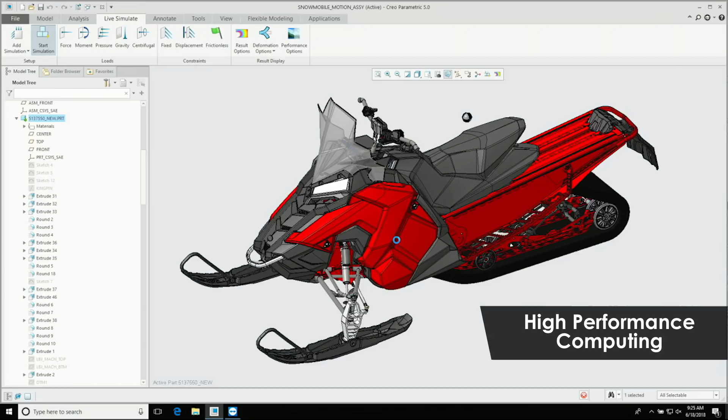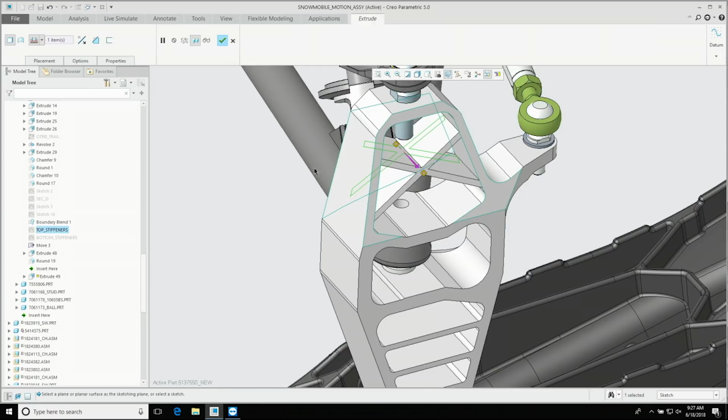This snowmobile has a certain part in its suspension that I'm fixated on. It's kind of rainbow colored right now to show the levels of stress and deformation. You can see that under load, this part's going to move around a lot. And if I look, there's some stress pockets here that are concerning - it's likely to break. So I've used analytics to simulate what will happen to that part, but now I can simulate it on each change. So I'm going to insert here some extra ribs, if you will, in this aluminum extruded part. And as soon as I commit that change, using high performance computing, we reanalyze that part, and I can see immediately that the problem's been solved.

So now think about it - with high-performance computing, I can simulate on each and every mouse click, basically, or certainly each and every change as I'm designing a product. I never get far off track because I have analytics in high-performance computing looking over my shoulder at the type of work I'm doing and guiding me each step of the way, whether each change I'm making is adding value or perhaps subtracting value.

Next, I want to talk about artificial intelligence and additive manufacturing through the lens of design. But before I do that, I want to show you something to think about, and that is how Mother Nature designs things versus how man designed things. So here's a quick little video clip thinking originally about a flying machine.

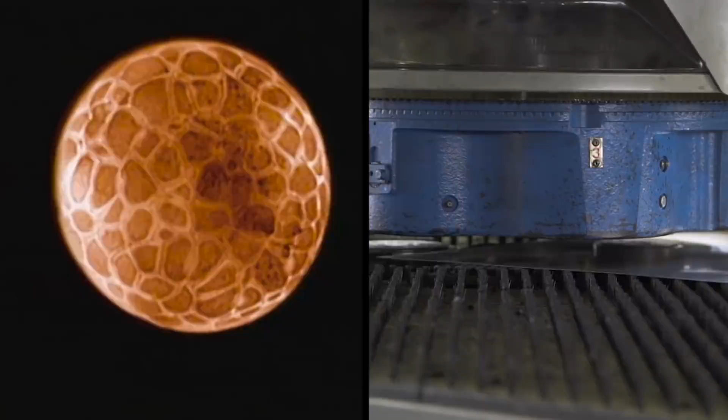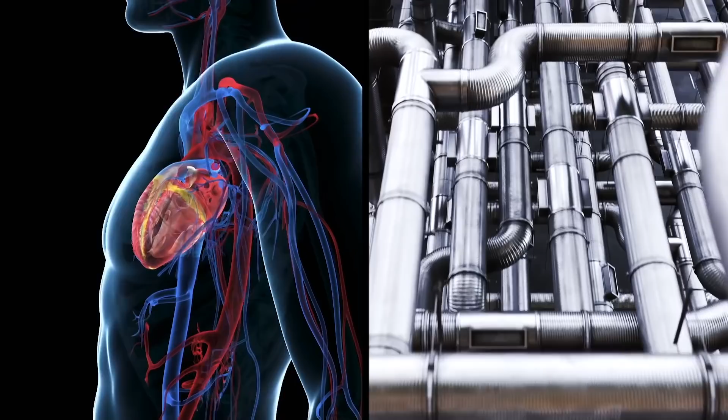Mother Nature makes very sophisticated designs using an additive process called cell division. And it yields very different solutions, for example, for capturing energy or for circulating fluids and gases and so forth. Mother Nature's systems on the left are extremely sophisticated and frankly extremely efficient.

Man's design on the right is trying to approximate that to the degree possible, but constrained by what we can actually produce. So, for example, the veins and arteries coming out of the heart have wildly variable diameters. That's pretty hard to produce. So in man's machines, much more of constant diameter piping and so forth.

So what's interesting is that if we use AI and additive manufacturing, we're no longer constrained to the limitations of traditional manufacturing processes, and we can get much closer to designs that really look like maybe Mother Nature created them herself. So I want to show you a quick example.

And for this example, I'm going to use an iconic Triumph motorcycle. Now, a Triumph motorcycle is a special product, and of course the cosmetic look and feel of this product is very, very important to the buyer. So I'm going to say, how could I radically change the design without making it look strange? Because probably if it looks strange, people wouldn't buy it.

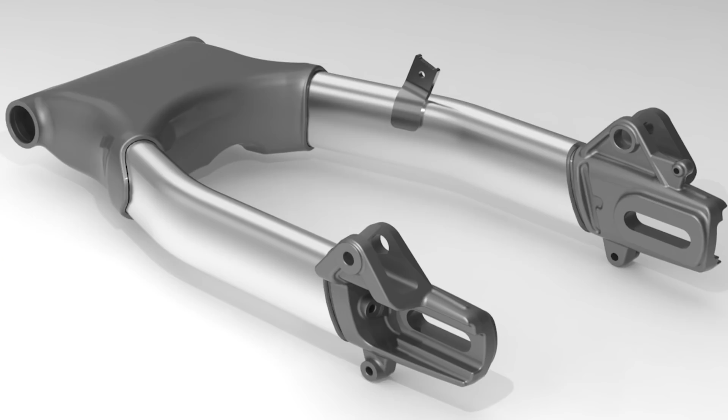And I'm going to use a strategy of AI-driven generative design on the front end and additive manufacturing on the back end. And I want to focus on a certain part, what's called a swing arm. It's the part that attaches the rear wheel to the motorcycle. It's a normal assembly made of steel castings and steel pipes.

It's 5 parts when modeled in a CAD system. That's what it looks like in traditional manufacturing. So now I want to switch to AI and additive, but I want to specify what the outer envelope looks like and then turn the computer algorithms loose.

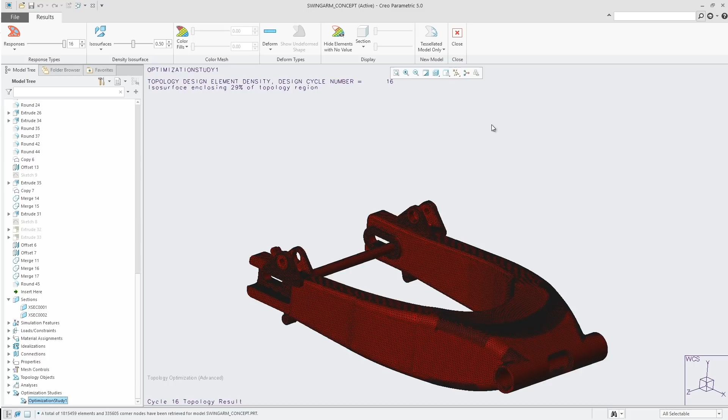So I say I want it to look like that outer shape, but you figure out what to put inside it. You don't have to make it hollow or make it solid. You can make it as hollow as you want, but make sure it works.

So the red elements here are really the areas that are calculated to carry meaningful load in the part. So you can see that's actually the efficient internal shape. Very, very strange shape, very strange looking.

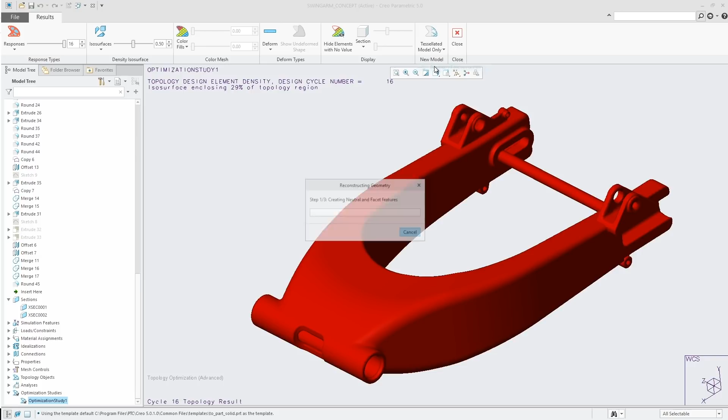And so by the time the CAD system regenerates this part with the human-specified outer shell and the algorithm-driven inner shell, I end up with a part that's really very interesting. It looks nice to the human eye, but look at the yellow shapes inside that human-specified outer shell. It's very, very elegant, interesting design.

Looks like something Mother Nature might have come up with. And it's a very efficient design. It will print as fast as possible, consume the smallest amount of material, weigh the least, and yet effectively carry the load. Realizing, of course, that the load is asymmetric.

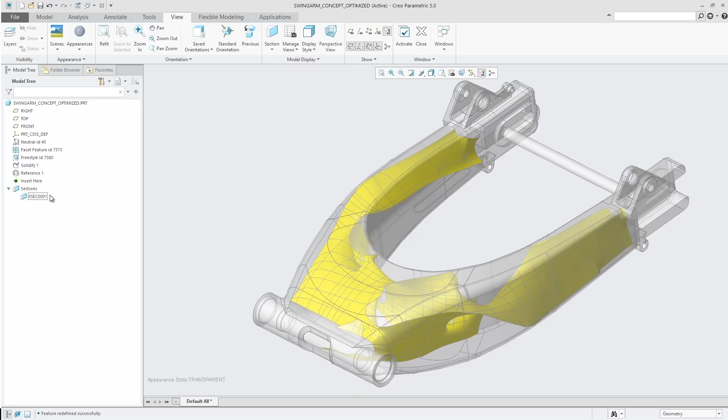There's a chain on one side, not on the other, and that's why the internal shape of the part is asymmetric as well. So a great example of collaborative design that's part human, part artificial intelligence, and in both cases, back-ended with additive manufacturing, because there's no other way that you could produce such a part other than to print it using, in this case, a metal form.

Now, switching from the physical part of products that are affected by digital transformation to the digital part of products, this is a profound story where more and more of the value of a product has become digital over time. This is an example inspired by John Deere of a tractor that maybe 30 years ago was purely mechanical. And then in the next phase, software came into the engine, software came into the cockpit.

Then they realized we could connect such tractors to the internet and track them, monitor them, optimize them. At the next level, we could actually have tractors share information with other pieces of equipment, and we could have a whole system of equipment that work together.

So for example, the harvesting equipment, the combine, if you will, could keep track of how much production we're getting from different areas of a large field, and that data could inform the fertilizing and planting strategy the next spring.

For example, we might put more fertilizer where production was low and less where production was high, and place the fertilizer in a narrow band, knowing that in the next pass we can land the seeds right within that band. So we'll fertilize the seeds and won't bother fertilizing the weeds between the rows.

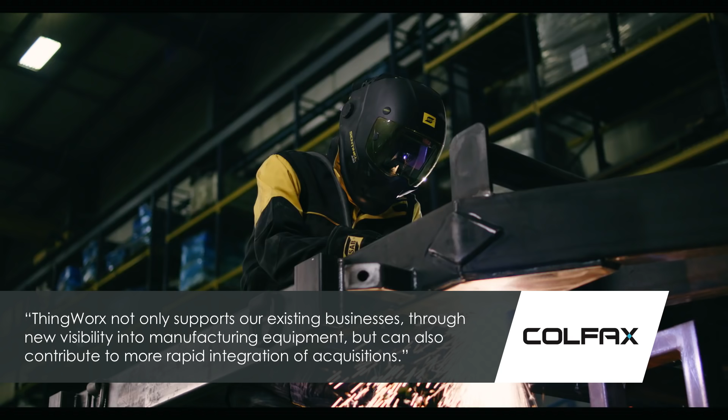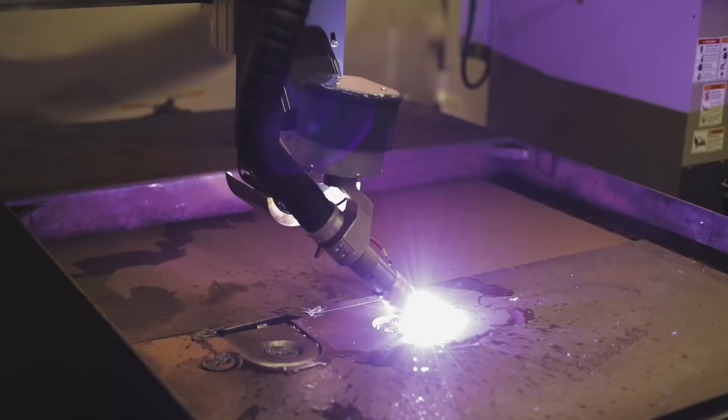Colfax is a company I know well. They produce, amongst other things, welding equipment, the ESAB welders. They might get used in a factory, out in the field to do repairs, in some type of cutting or fabrication process, in a custom shop, or in a construction process.

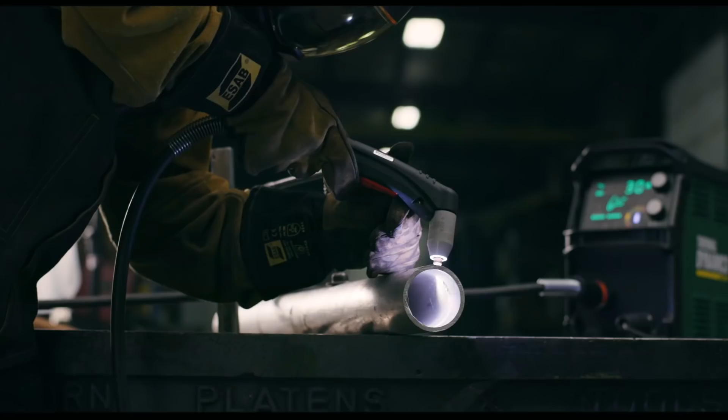So lots of different applications, and if I could gather data from all the welders and all the different use cases, grab the amps and voltage, when and how it's used, and frankly when it didn't work if there was a problem, I could very much optimize the design of that product, perhaps the production process. For sure, the customer support and service processes could be significantly optimized across a big fleet of very different welders, in this case from the company with the ESAB brand.

Let me switch to a different example. Otis has a strategy called Otis One that connects hundreds of thousands of elevators and escalators back to a central system, where they can be monitored. Predictive analytics can be used to determine when service would need to happen and to send service technicians out, fully ready to solve the problem when they get there.

Another great example is Trane. Trane produces heating, ventilating, and air conditioning equipment.

So these kind of units that you might see on the roof of a building, it turns out these units end up everywhere. I'm sure you can find them in every city, in every state, and probably around the world. But there are wear parts in products like this, and sometimes there are problems that need to be serviced. So Trane found there was a tremendous opportunity to make spare parts management much more efficient.

If I don't have any data about where the units are or how well they're working, then I need to have a lot of inventory of spare parts, because if any unit in any city goes down, I need to fix it quickly. Keep in mind these things only run when you need them to run. And if you need them to run and they don't run, somebody's getting uncomfortable.

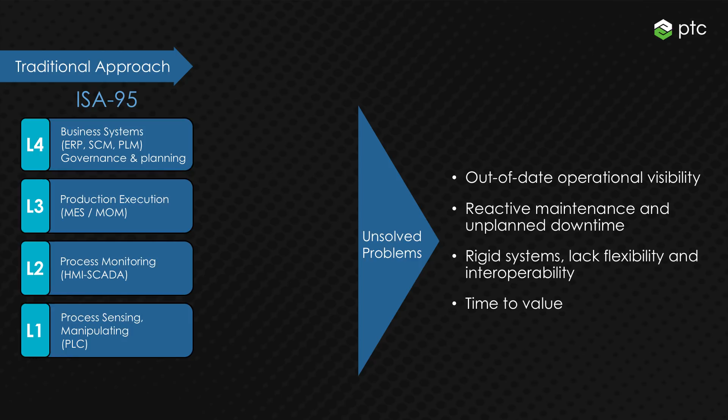So there's lots of data out there, but there are two main problems. Number one, these are silo systems - they all have part of the data, and they don't do an effective job sharing it with each other. The second problem is they don't actually have all of the data. There's a lot of data in other places that we really would need to get the full understanding of what's happening in a factory so we could optimize it. So even though progress has been made, the system could be optimized to a much greater degree.

That's really where the notion of industrial IoT comes in and is applied in the smart factory setting. The first thing an industrial IoT system does is tap into all the existing sources of data at level 1, 2, 3, and 4. But the second thing it does is tap into non-traditional sources of information. Lots of new sensors can be placed throughout a factory to measure heat, vibration, humidity, noise, whatever you want. And that picture can be integrated.

We could get data from external systems measuring weather or many different sources of potentially interesting information. We could get information from trucks moving throughout the supply chain - what do you contain, where are you, and how soon will you be here? And we could get information from other supply chain systems and so forth.

By integrating this all together - connecting, aggregating, and using analytics to help us understand this data - we can really change what's happening in a factory. We can do much better asset performance management, making sure machines don't go down unexpectedly. We can do much better operations performance management, making sure all lines run like our best line. And we can do many other types of optimization delivered through new applications that are role-based, real-time, predictive, and very flexible. So many companies around the world now are bringing in industrial IoT technologies, wrapping and extending their existing systems with a new layer of digital technologies.

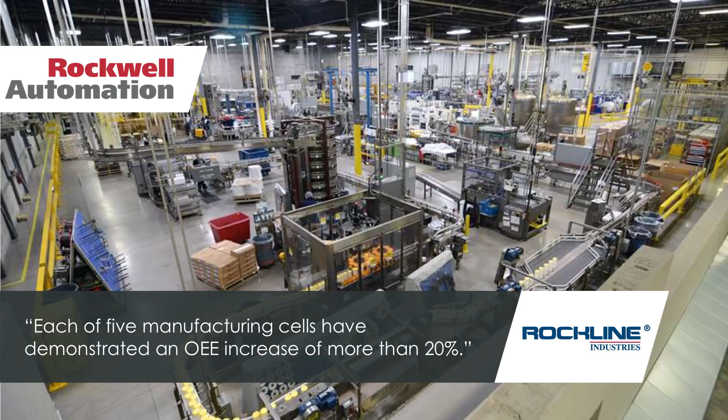Here's some examples. The company Rockline, a good customer of our partner Rockwell Automation, was able to instrument and connect 5 different lines and drive OEE up by more than 20%, simply by getting a better understanding of what's happening such that it could be further optimized. So a 20% increase in OEE is a very big payback in this type of industrial environment.

Or the company Woodward. Woodward produces many different parts used in aircraft, aircraft systems, engine control and monitoring systems, a lot of different components, but also equipment used in wind turbines, in automated production lines, and so forth. In this case, it's not about tracking the products, it's about tracking the factories that make the products. Woodward's done a good case of using industrial IoT and analytics data to compare all the different factories to each other, sort of internal benchmarking to understand where there are further improvement opportunities.

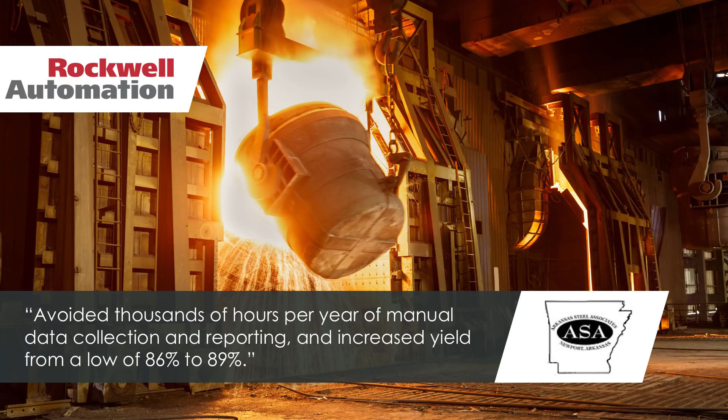Another great example comes again from Rockwell in the form of Arkansas Steel. Arkansas Steel, of course, has continuous improvement processes, as you might expect. But what they found is that it was so hard to get all the data when it required humans to go out and measure and collect and aggregate and analyze this data. By instead placing sensing and PLC systems and then gathering the data automatically, they were able to drive yield up by 3%. A 3% increase in yield really does move the needle quite a bit. So it's another great story about industrial IoT.

So thinking about operations, I mentioned industrial IoT. I mentioned artificial intelligence and analytics being applied to process automation. These are strategies that really do move the needle for manufacturing companies. So the last thing I want to talk about is people.

Now, manufacturing enterprises have a lot of people. And maybe a strategy in former years was to bring in more automation so that we didn't need as many workers. But I think in every case, there remains a lot of workers because there are many problems that are much easier to solve with people than with automation. Now, what if we could make people much more productive?

So I want to start by saying there's a very large problem here that needs to be solved. There was a study done by the National Manufacturing Institute, part of the National Association of Manufacturers, in conjunction with Deloitte, and it's been updated a few times. Their latest conclusion was that by 2025, there will be about 3.5 million production workers who have retired and only about 1.5 million who have been recruited to backfill them.

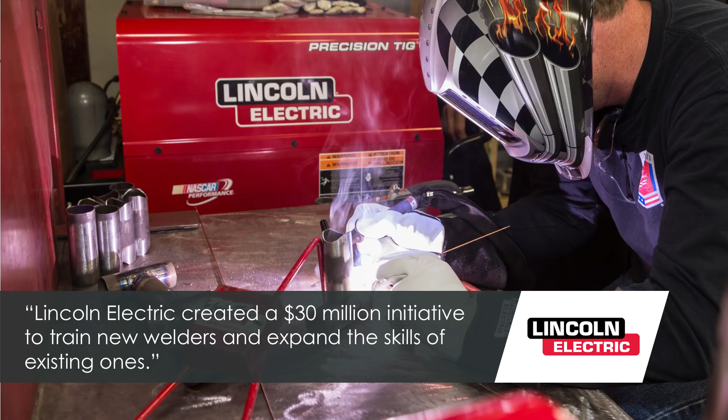Or in a much smaller environment, Lincoln Electric is spending $30 million to train new welders and to make the existing ones more skilled. So again, if Boeing's spending $100 million and Lincoln Electric's spending $30 million, this is a problem worth solving. So how could we solve it?

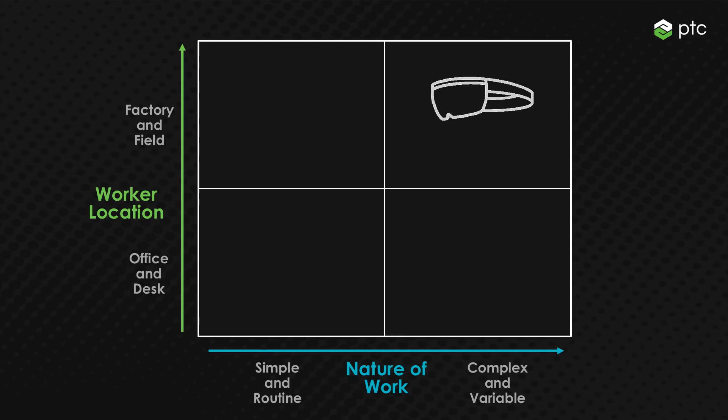What do we do? Well, I think the answer here is augmented reality, and I want to try to explain why. So first, it's worth looking at what is augmented reality. Augmented reality really means a set of technologies that allow you to take digital information and make it a natural part of the physical environment.

Now let me drill into that a little bit deeper. Let's imagine there's a digital cloud, as there is, and it's full of impressive computing and analytics power and a tremendous amount of digital data, which could be helpful to our processes, whether they're manual or automated.

Now, if our processes are automated, we know how to plug machines directly into that cloud. If you think about how much automation has changed in the last 30 years, going from paper punch tapes to the kind of automation we have now, it's an incredible amount of change that has happened in the last few decades. But let's think about how do we give digital information to humans?

Actually, I'd argue that hasn't changed very much. I have an iPhone here, and when I think of it and how I interact with it, it isn't that much different from the first Macintosh I got from the same company 30 years ago. That was an app that gave me windows of graphical and text-based information, and now I have a phone that runs apps that gives me windows of graphical and text-based information. So we really haven't advanced the capability of humans much at all, meaning robots have benefited from the explosive power of digital to a much greater degree than humans have.

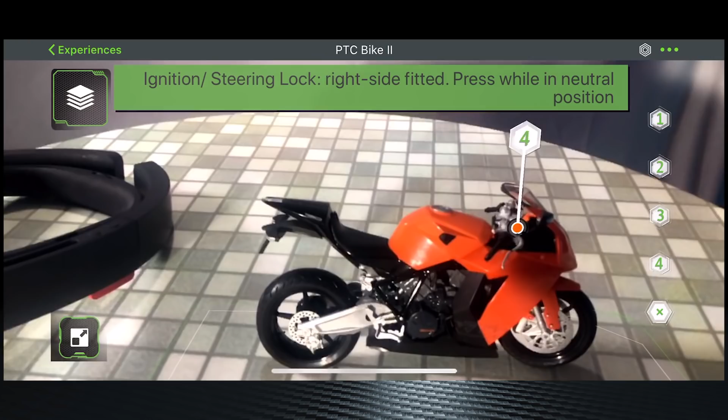Now finally I might say, anything else I need to know, perhaps from a safety perspective? And it says, yeah, just be careful because these parts, the engine and exhaust system, get hot during operation. So please be aware of that.

Now let's take one other example. Let's say I'm the service technician. First thing I could say is help me to assess this product, kind of like do a diagnostic x-ray, if you will, on it. And you see there's some parts kind of highlighted here in yellow on that swing arm.

And I might say, okay, analyze what seems to be wrong with those parts. And I see that there is a swing arm deviation, and here's the analytical data around that particular problem.

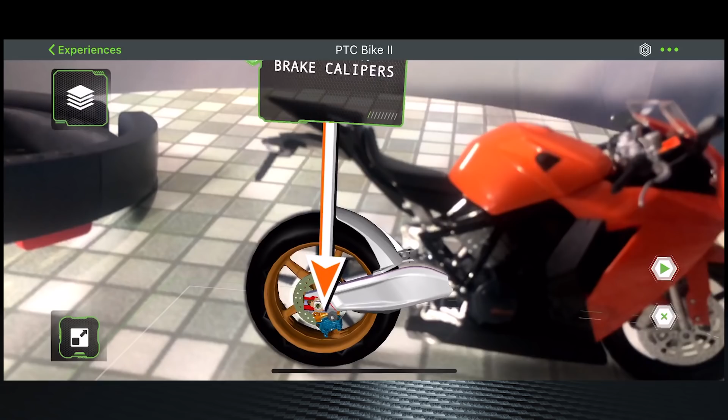Then I might say, show me how I would repair it. And it gives me a play button on the right side. If I press play, it says step 1 is to remove the rear brake calipers, which are down here, and the bolts are coming out, and then the caliper itself comes out. And then we see that step 2 is to remove that rear axle nut that's blinking and twisting off.

And then step 3 is to remove the rear axle bolt. It goes out the other side. Step 4 is to remove the entire rear wheel assembly, and out it comes, and so forth. And then finally remove the fender and keep going. So hopefully that all makes sense.

Now what I want to cover is one last topic. That was augmented reality, putting digital information on a physical motorcycle. But what if I didn't have the physical motorcycle? I'm supposed to work on it tomorrow, but I would like to practice. So in this case, I'm going to bring the digital twin down and place it on the table here. And you see that's the digital representation of the motorcycle.

So let's say I don't have the motorcycle, we'll just set that aside. And I still want to understand what will I need to do to service it. Well, let's go into the service mode, and I would say, okay, step 1, assess it. And it says, here's the problem. And step 2, analyze the problem. And it gives me the same kind of data I had before.

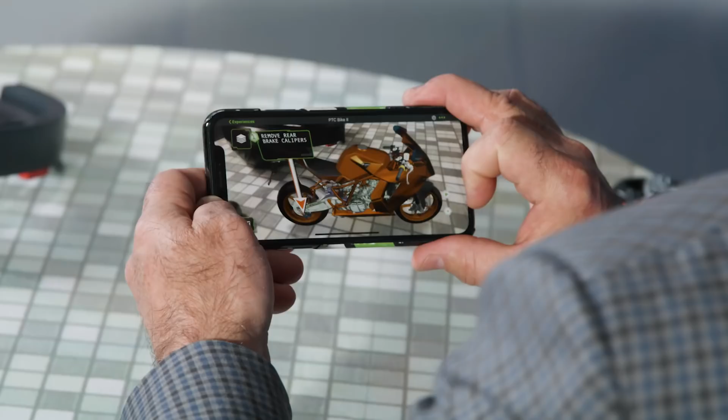Then step 3, show me how I would go about repairing that. And again, the exact same procedure can be played against the digital twin. So what I can do on something real, I can repeat or practice on something virtual using virtual reality. And these are very powerful concepts.

Okay, so hopefully that demonstration was helpful in kind of putting the concept of augmented and virtual reality in the forefront of your mind here, so that I can talk about how you might use it as part of your industrial transformation strategy.

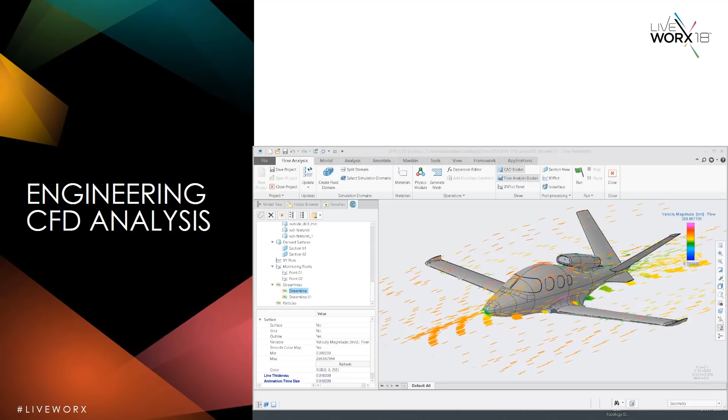I want to show you one quick example that I'm going to refer to, and this is a company called Cirrus Aircraft, who produces, amongst other things, this new personal jet. And just to show you an example of how augmented reality is being used, this is the CAD model of the jet in an analysis package that was doing computational fluid dynamics.

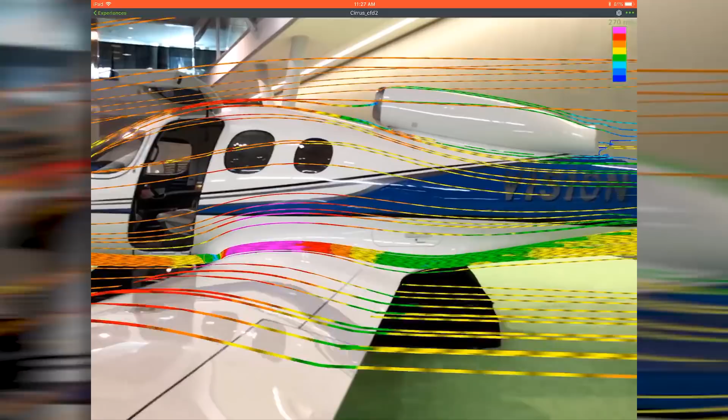And here I've taken the flow lines off the CAD model and put them on the full-size aircraft. So the point really is I can digitally see things now, or I can see things that are digital that, if I take my smart glasses off, I can't really see because they're not really there. But it's information we have that's very, very powerful. And think about it here. I've been able to effectively create a wind tunnel with augmented reality, where I can take digital analyses and place them on physical products and really see what's happening, as that aircraft flies through the air, in this case, the air being simulated.

Let's talk about the capabilities that augmented reality brings to the table. First, like that airplane, or the fuel level in the gas tank on the motorcycle, you can visualize information that otherwise would not be visible. I can visualize sensor readings, have an entire human-machine interface on something, or visualize flow lines of air around an inanimate object. So digital information becomes something I can see and hear, as if it were part of the analog environment I'm immersed in.

The second thing is we can provide instructional content. I can show you how to start the motorcycle, or how to take the back wheel off, step by step, and even bring an expert in to join the session. If you're struggling with the instructions, an expert could join the session and see what you see, providing guidance that shows up as digital content in the physical world.

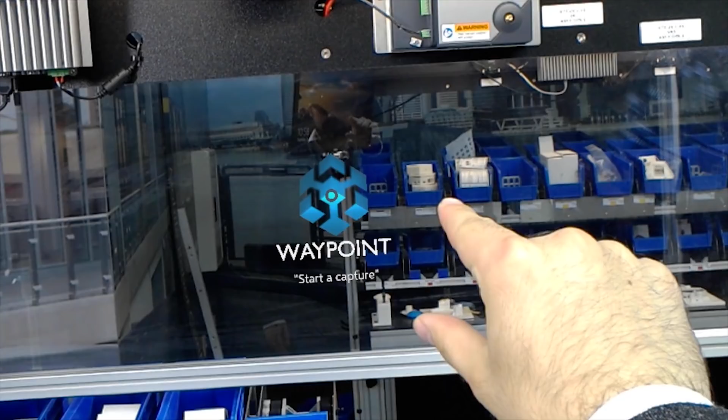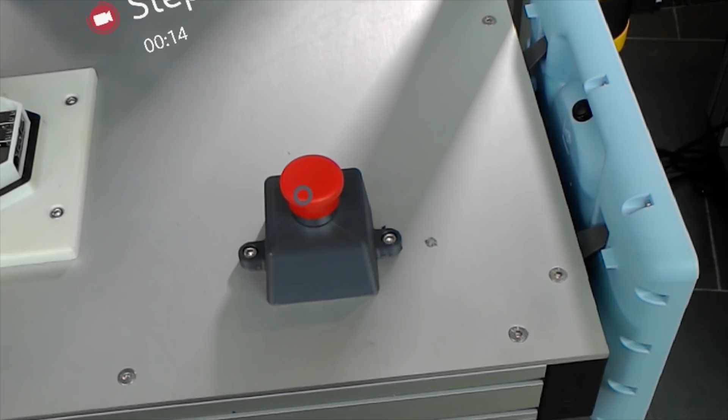Let me give you an example - here's a quick video clip of the retiring worker. This first worker, wearing a HoloLens, is firing up a piece of software called Waypoint. A waypoint, by the way, is a 3D GPS coordinate, so it's X, Y, and Z. He's doing what he always does, but recording his voice, taking pictures, and it's all being videotaped, and we're placing waypoints - 3D points in space to say this content lives here in space.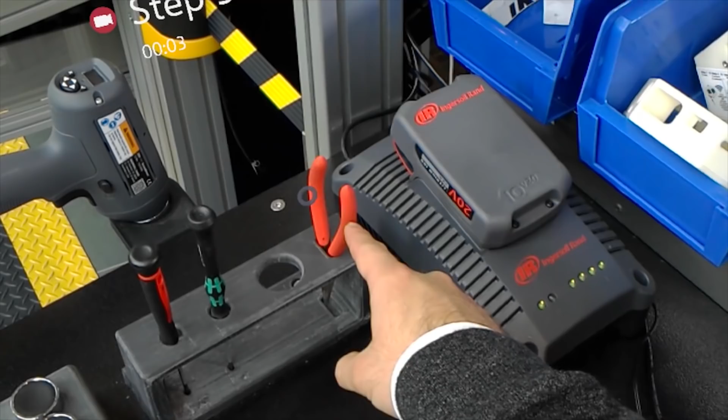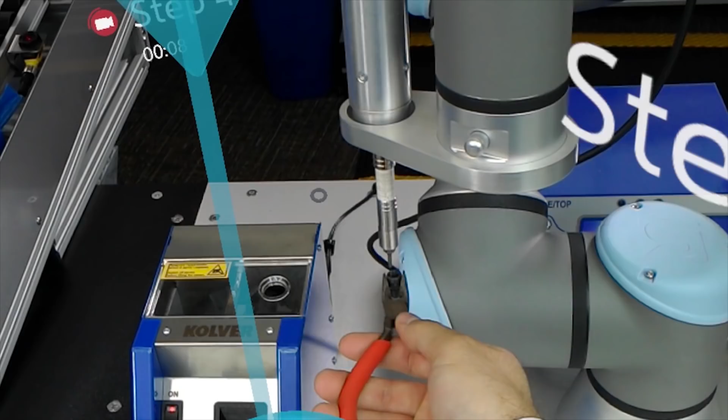Second, he interacts with the robot and captures that in a video attached to a waypoint. Now he's pointing at a pair of pliers and taking a picture, attaching that and voice commands to the pliers. And now he's using the pliers in another step to manipulate the bit on the end of the robot. So he's recorded a whole process while actually doing it.

We had the expert do what he always does, but we've extracted the expertise. And now we have an author, an editor if you will, tweaking it a bit, trying to make it a little prettier, perhaps more succinct, and even printable if we wanted to print it in PDF.

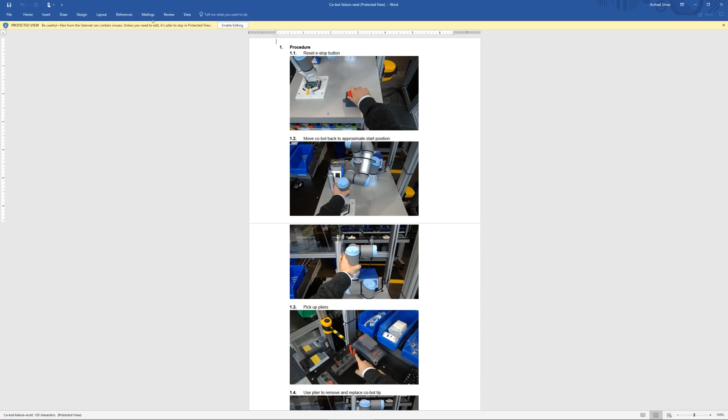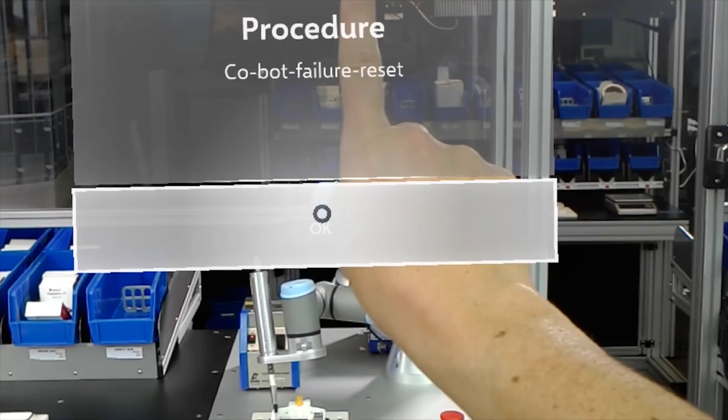Now the new employee comes along, puts the HoloLens on and says, guide me through that procedure. She says, I want to do the cobot test. And it says, okay, number one, reset the e-stop button, just like the expert did right here.

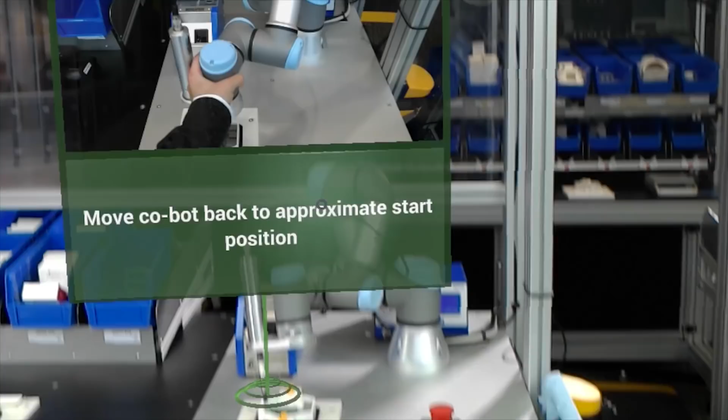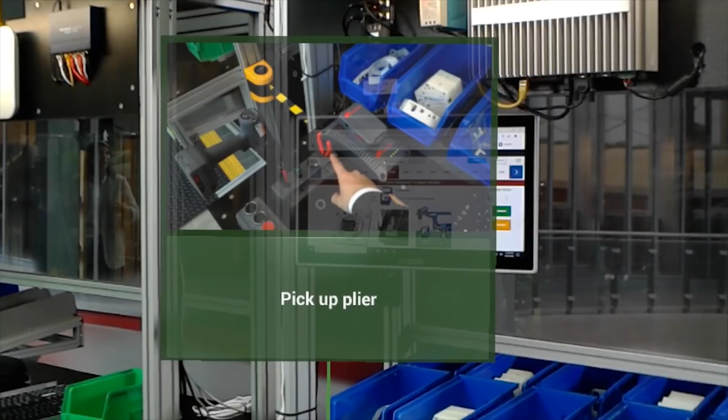First, she confirmed that was done, which is helpful to know. So step two is push back the cobot arm, just like that - and again, that instruction was attached to a point in space. Then she confirms that she did that. Step three is come over here and grab this pair of pliers right here in space, and she does that, then confirms that this has been accomplished.

And then step four is come back to the robot and manipulate the bit on the end of the piece there, as shown.

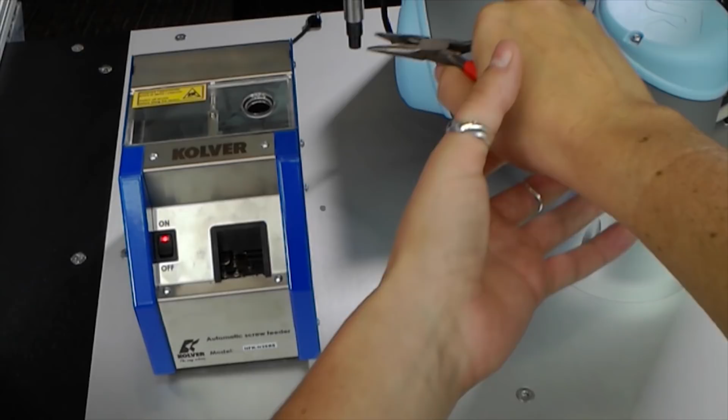That's a great example of a retiring worker leaving his or her expertise behind in an AR format that we can pass on to somebody else, and even see how well this person ingested the information. How long did it take to do each step? Should we tweak the steps, or are we happy with the performance time? This is an example of AR solving the retiring workforce training problem that comes with bringing in the next generation.

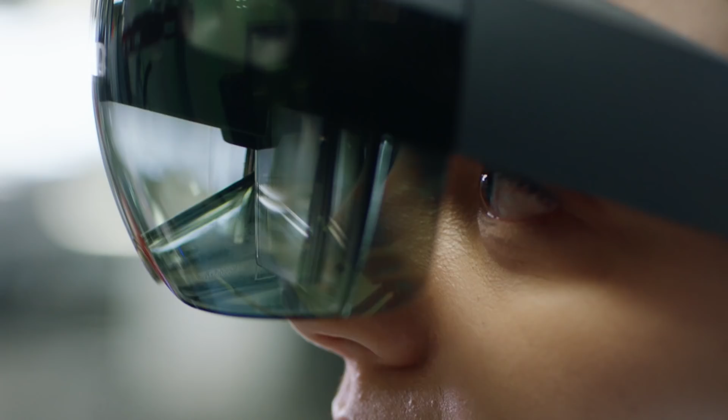Here's another example of AR being used by BAE in the assembly of batteries used in hybrid buses. The worker puts on a HoloLens and does an assembly process, with digital instructions floating in space right in front of her.

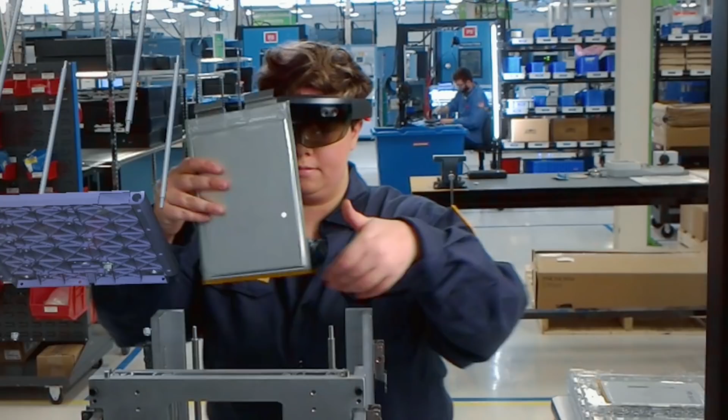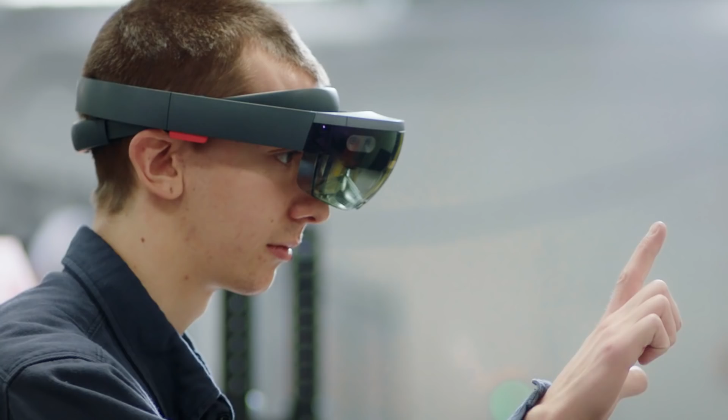She's basically confirming, I did that step, and it says, okay, here's what you should do next. This procedure was authored from the engineering CAD data used to specify the manufacturing of the components, and now it's guiding her through the complete assembly to make sure she did everything right and didn't omit any steps. Another powerful example of using augmented reality for manufacturing instructions.

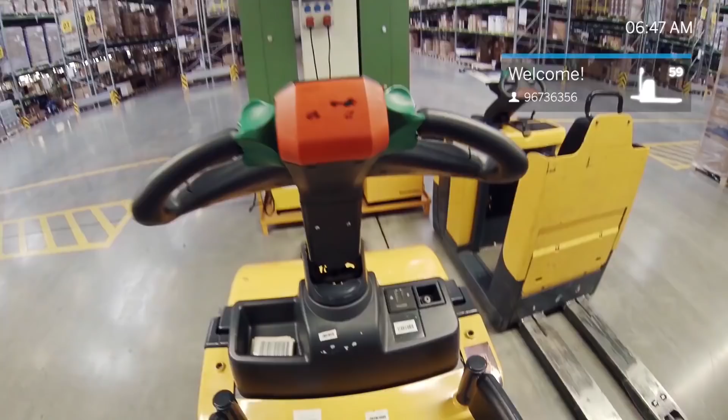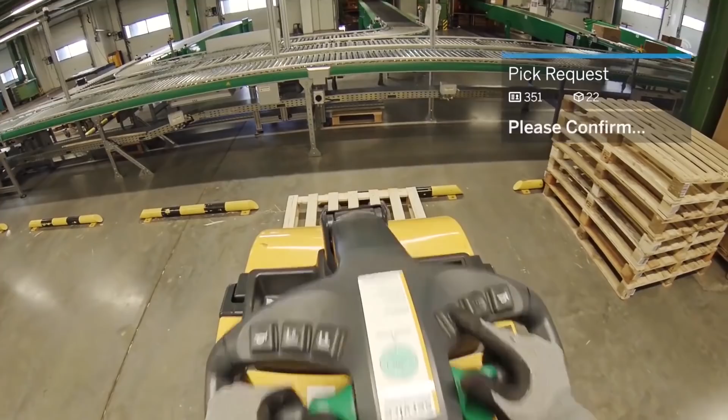Here's a fun example from a warehouse. I put on my smart glasses, I'm a warehouse worker, I jump on my forklift. It asks, do you want to do a pick request in the upper right? I say yes. Then it says the next scheduled pick request is this one, please confirm you're willing to do it. I say, yeah, okay, I'll do it.

It says, go to aisle 17, shelf 3, and here is the bill of material to pick up for this load. You'll see an arrow on the floor that suddenly becomes a turn-left arrow, and in this column you should find the next parts to add to that pick list. Pick up the parts, maybe scan the barcode, place it in the order, and move on to the next one. This would be an AR-guided picking process, like one might find in a warehouse or a spare parts depot.

Tremendous improvements in human productivity, on the order of 30 to 50%, can be gained by the use of augmented and virtual reality. These improvements are big enough that companies are beginning to ask where they should draw the line on automation—when to automate with robots, and when to make humans more effective. Both machines and people have skill sets, a little different, but now we have both levers to pull: automate with machinery, or automate with better information sent to people, taking advantage of human flexibility and the ability to quickly move from one task to another.

So I reflected on digital transformation as it relates to products, showing examples of how you could differentiate products and bring Internet of Things, analytics, and artificial intelligence into them. I talked about how Internet of Things and AI drive process efficiency, and then showed how augmented and virtual reality can address human productivity, particularly workforce turnover and expertise shortage found across production and service workers.